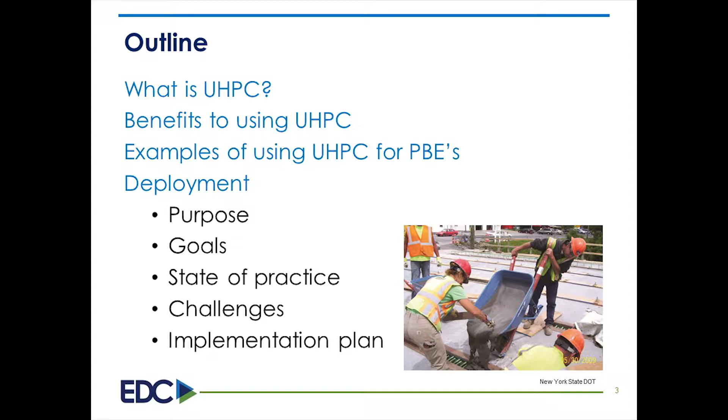So what we're going to talk about today is we're going to start off and explain what ultra-high performance concrete is, what the benefits are to using it, and look at some examples of using it for connecting prefabricated bridge elements together. Then we're going to look at the deployment plan, the Every Day Counts deployment plan, the purpose, goals, take a look at the state of the practice of using ultra-high performance concrete in the country, some challenges to using it, and a few details of the Every Day Counts implementation plan.

So getting right into it, what is ultra-high performance concrete? Ultra-high performance concrete is a steel fiber reinforced concrete that has mechanical properties that far exceed that of conventional concrete. And it has a pore structure that makes it resistant to penetration by water and chlorides.

The most important thing to know about ultra-high performance concrete is it doesn't have any special or magic ingredient you haven't heard of. It's Portland cement concrete. We're familiar with the ingredients - it's cement, aggregate, and water. However, it's a special, unique, new formulation of these ingredients. It uses an especially high amount of cement, doesn't have any large aggregate, and uses very little water, just enough to complete the hydration process.

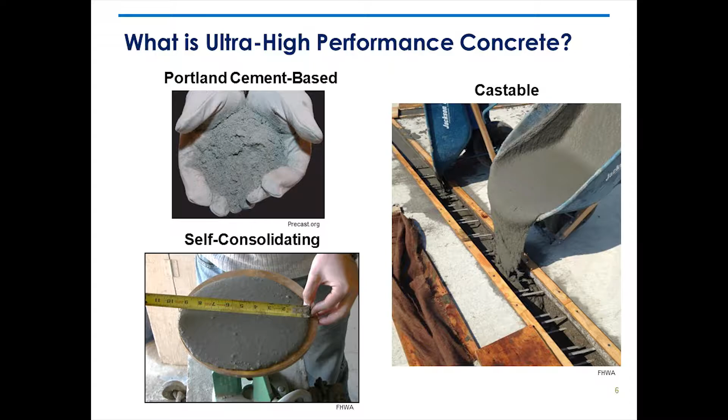In addition to Portland cement, fine aggregate, and water, ultra-high performance concrete also has a large amount of steel fibers. We use reinforcing steel in conventional concrete to carry tension and control cracks, and the steel fibers are used to do this in ultra-high performance concrete. I said there's a lot of steel fibers - I'll say it again, there's a lot of steel fibers. It's 2% by volume, about 250 pounds of fiber per cubic yard.

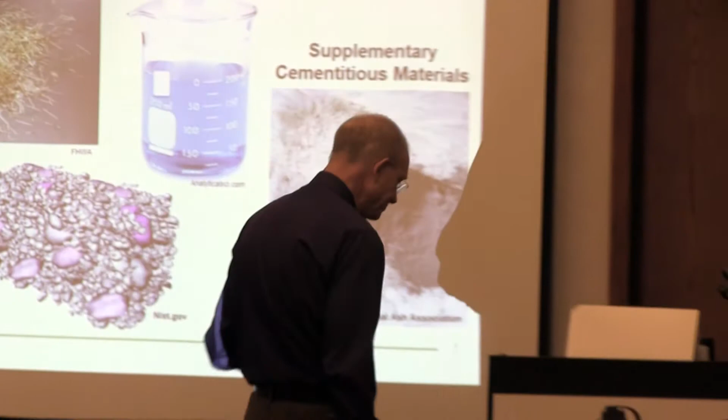Have you seen a bridge deck before they cast the concrete? You see all that rebar in the bridge deck and you say, man, what are those structural engineers doing with all that rebar? Well, oftentimes in a bridge deck, my experience is you have about 200 to 300 pounds of steel per cubic yard of concrete. So what's the point I'm making? That gives you a picture of how much steel fiber we're talking about in ultra-high performance concrete - about the same amount as you would have of reinforcing steel in a bridge deck.

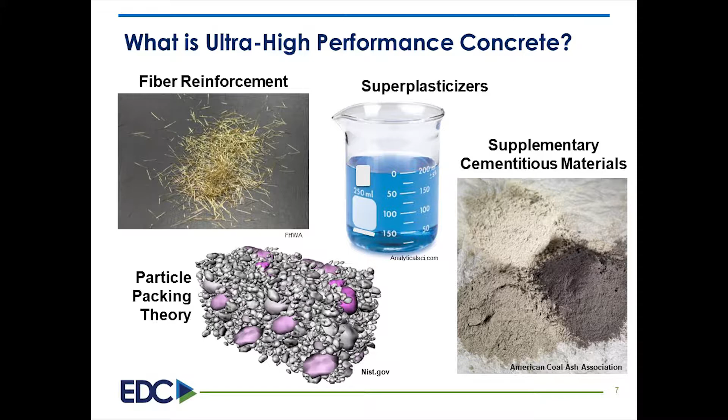Superplasticizers are used to decrease the amount of water needed for the mix while still having a highly flowable mix. In addition to the Portland cement, there are supplementary cementitious materials, usually fly ash, and very commonly used silica fume. There's no large aggregate - the aggregate is composed of fine sand and ground quartz, which are formulated to work with the cement using particle packing concepts to produce a very dense, impermeable mix.

So what we'll pass around now is this is our dry mix without the steel fibers. So here you have your cement, your sand, and your quartz. Let me say that a different way - here you have your Portland cement and all your aggregate right here.

No fibers in this one. But did we get the hockey puck going? There are still fibers in that hockey puck, as you can see, the steel fibers in that one jar, and then look at them when they're in the concrete that's been cast. It's not like, how should I say that? It's not like it's especially hairy, that they're all sticking out or anything like that. Okay, where was I?

Compared to conventional concrete, ultra-high performance concrete is characterized by having a very high compressive strength, a high tensile strength, low permeability, which makes it highly resistant to freeze-thaw damage, and it's self-consolidating.

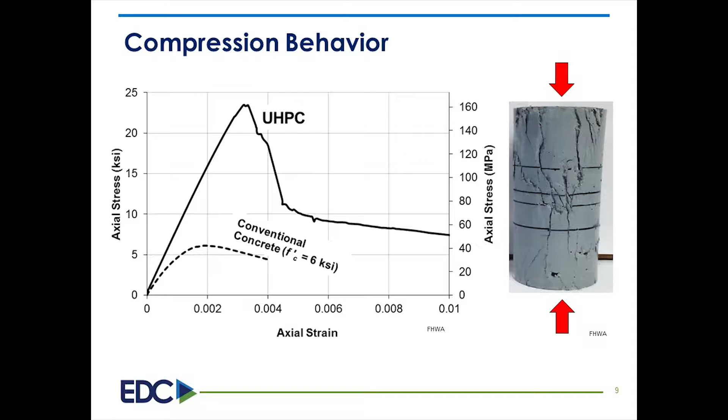As we see here, the strain response to stress, it's twice as stiff as the conventional concrete, and it's about 3 to 4 times stronger than conventional concrete. And even though this strength is very important, it's not as important as the tensile characteristics of the ultra-high performance concrete, which we'll look at next.

This stress-strain diagram compares the tensile response of ultra-high performance concrete to that of conventional concrete. Ultra-high performance concrete is defined as having a peak tensile strength of 720 psi. In this example, the ultra-high performance concrete has a peak pre-cracked tensile strength of 1,300 psi. And the conventional concrete is showing as having a peak tensile strength of 400 psi. So the ultra-high performance concrete is about 3 times stronger in tension than conventional concrete.

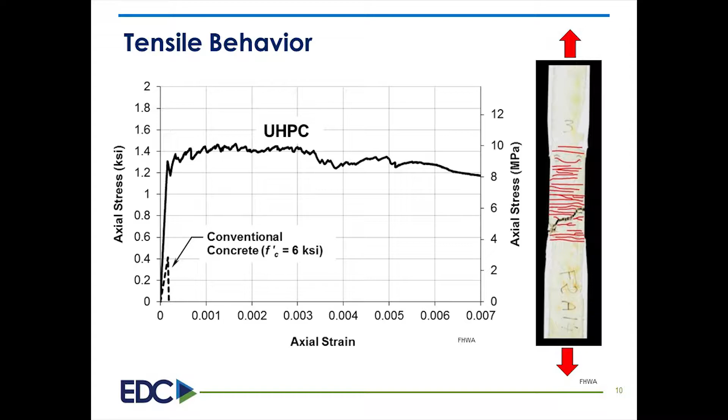But more importantly, the behavior is fundamentally different. With conventional concrete, after the first crack, the concrete loses all its tensile strength. With ultra-high performance concrete, after the first crack forms, the tensile strength drops slightly, but then it goes up again as the fibers extend across that crack. Then the next crack forms, and the strength goes up again. We get this sawtooth behavior as the tensile stresses are transferred from the concrete to the steel fibers.

These fine, well-distributed cracks are shown on this photo on the right by these red lines. Eventually, as you keep pulling on it, one large crack forms and the member fails in ultimate tension. So tension usually controls our design of concrete, and this difference in behavior lets us design things differently with ultra-high performance concrete.

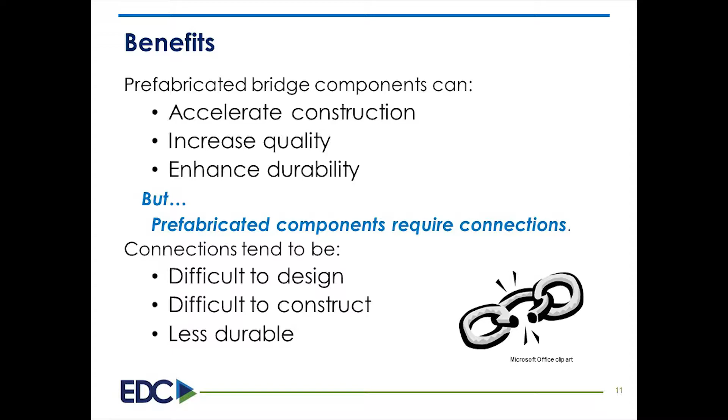Prefabricated bridge elements can be used to accelerate on-site construction time and improve the durability and quality of our bridges. However, some of the benefits of using precast bridge elements can be lost when you go out in the field and connect them together with field cast concrete. Using conventional concrete, those connections between our prefabricated bridge elements, especially the rebar details, can be difficult to design and difficult to construct.

Ultra-high performance concrete can be used to simplify the design of these connections. It's stronger, and it does a better job at transferring stresses from one precast element to the other. Less concrete and less rebar is needed for the connection. But in addition to simplifying the connection, ultra-high performance concrete is more durable. So you don't have high quality precast concrete elements interrupted by connections with inferior concrete. The weak link in the system with prefabricated bridge elements is the connections.

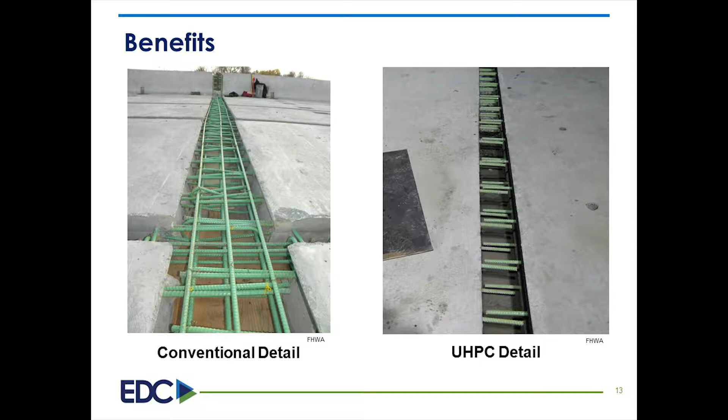Here we compare a connection made with conventional concrete and a connection made with ultra-high performance concrete. These connections are in a precast deck panel, full depth bridge deck panel. Conventional concrete needs more rebar and more concrete for the connection than ultra-high performance concrete. Not only is there less concrete and less rebar with the ultra-high performance concrete, very importantly, there's less congestion. Also, using the guidelines that are available, you don't need to have contact lap splices. So with fewer pieces of rebar that don't need to be in a contact lap splice, we can get less interference in our connections.

Looking at this picture, when we're thinking about costs, we want to look at the total cost of our connections instead of just comparing the cost per cubic yard. The cost per cubic yard of ultra-high performance concrete is very high, but it doesn't give you the full story or the full comparison to conventional concrete. There are more costs going on between these two than just the concrete itself that's being used for the connection.

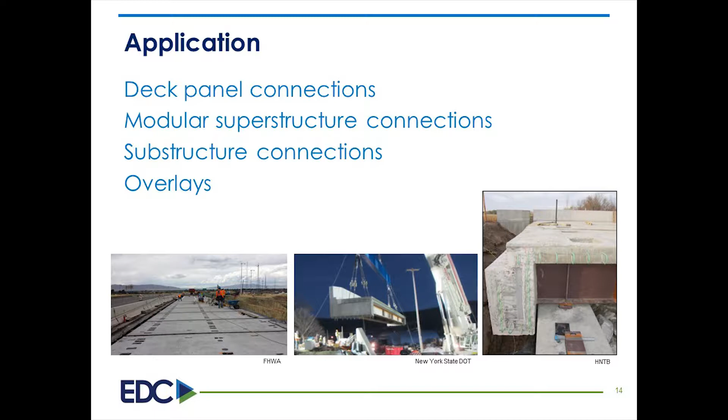Let's look at some applications. You can use ultra-high performance concrete for deck panel connections, for modular superstructure connections, substructure connections, and you can use it for overlays, where overlays aren't connections.

It doesn't belong on this slide, but I put it there anyway. Iowa had the first project this year in the United States to use ultra-high performance concrete for an overlay, and I believe Delaware has a project in mind to use it for an overlay too. Even though it's not a connection, I included it to illustrate that given the durability characteristics of ultra-high performance concrete, there are other benefits beyond connections.

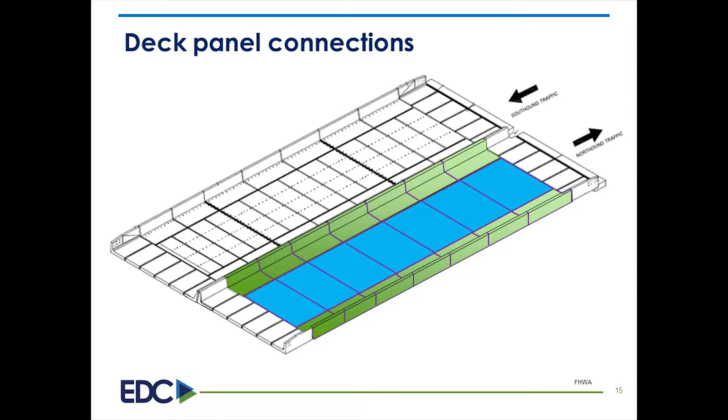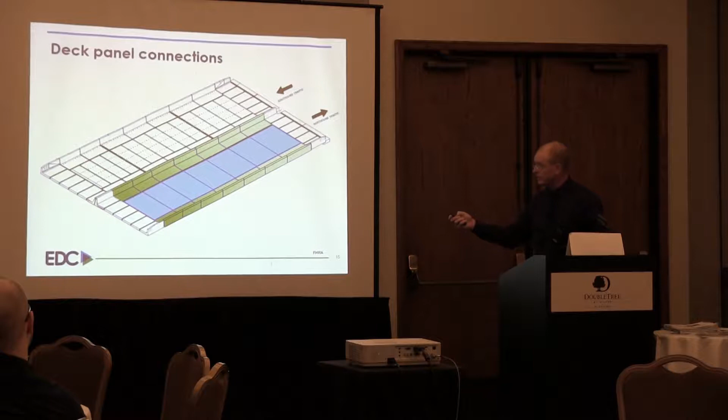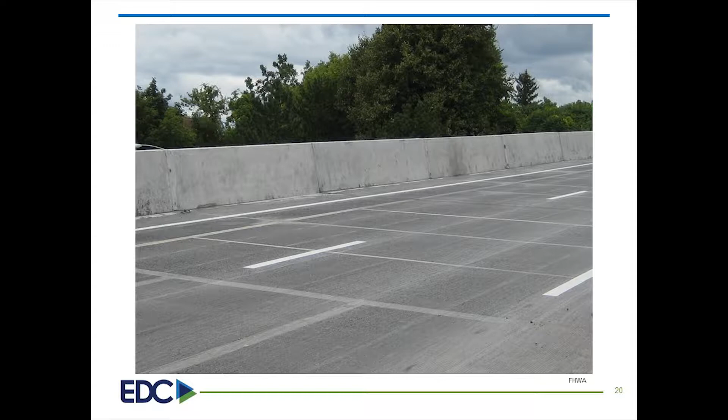Looking at the bridge deck after completion, the light gray areas show where the ultra-high performance concrete connections are located.

Given the durability of the concrete in these precast deck panels and the durability of the ultra-high performance concrete connections, you don't necessarily need to use a protective wearing surface on this bridge deck if you don't want to. In this particular case, New York didn't, and instead they milled the entire bridge deck to provide a very smooth, durable surface.

Let's move on from bridge deck panels to modular superstructure sections.

What do I mean by a combination of details? Sometimes they'll use transverse post-tensioning, or much deeper shear keys. I've seen some details where they put a world of rebar at that joint. With ultra-high performance concrete, there's the opportunity to simplify the connection and have a smaller connection with simple rebar details and very durable concrete along that connection.

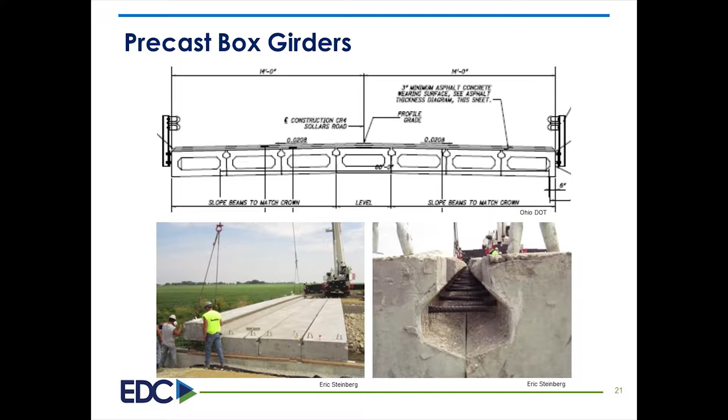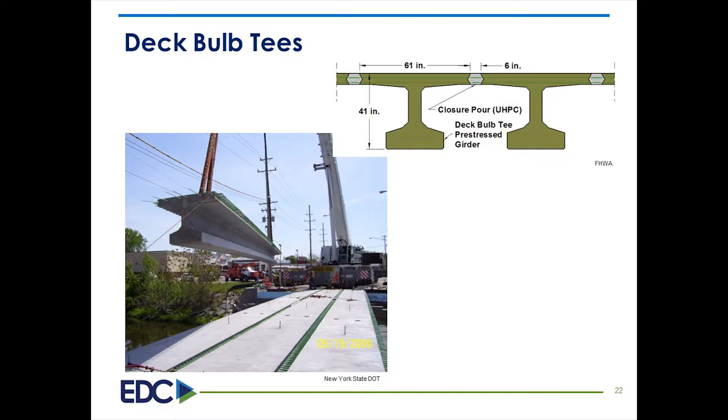Another modular superstructure type: some states like to use bulb T-girders without a deck, and in this case traffic rides right on top of the top flange. It's important to have a strong concrete for this connection, and also a concrete that is durable enough to withstand exposure to the weather and to vehicle traffic.

Ultra-high performance concrete, the state of Washington is looking at it as a solution for this connection. I believe the state of New York, in one of their earliest jobs if not their first, used ultra-high performance concrete in this application, meaning with deck bulb T-girders.

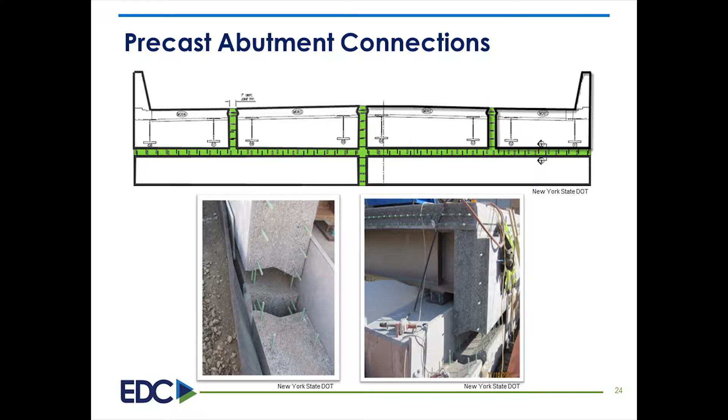This is a project in New York, an abutment. The abutment was connected together using ultra-high performance concrete and was connected to the superstructure using ultra-high performance concrete. As we saw with the bridge deck panels, we see narrow, smaller connections, small quantities, simple rebar details, and little rebar interference in these connections.

Our last example, we'll look at splicing some larger bars, going back to New York.

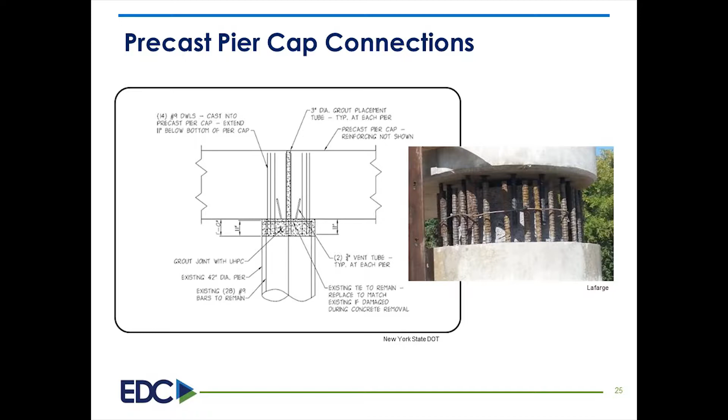On this particular project, New York was connecting a new pier cap to an existing column. Using number 9 bars, they were able to use lap splices and with ultra-high performance concrete, complete the connection within 1 foot. For anyone who designs lap splices, you know that even with number 5 bars, you're starting to get into a couple feet for a lap splice. But with a Class B lap splice with number 9 bars, you would need several feet for that connection, especially if they're epoxy coated - it gets even longer. New York was able to do it with 1 foot. One of the things that's so significant here is that with a conventional concrete connection, they would have had to remove several feet of concrete from that existing column. But here they only needed to remove the 1 foot, which made it a lot more practical.

So what did we just do? We took a look at what ultra-high performance concrete is, some of the benefits of using it, and looked at some applications. Let's look at some of the elements of the Every Day Counts implementation plan for ultra-high performance concrete and the state of the practice in the country. One thing I wanted to say at the beginning of the presentation - at any point please interrupt me if you have questions, and if I say something that doesn't make sense, it's good to catch me right there so I can correct it. So ask questions at any time.

I don't know that I've had any experience with the wear rate on precast concrete decks. In Colorado, because of the connections, we were typically using membrane and asphalt on them. But I'm wondering if the wear rate on precast deck panels is that severe, because with those we're using like 10 KSI concrete in those panels. It's interesting because in the Northwest where you have studded tires, it's surprising how much that Portland cement concrete does actually wear. Oftentimes that pavement - I've seen that rutting - is 4,000, 4,500, 4.4 or 4.5 KSI concrete. With your precast concrete, you're typically getting, or we were at least getting, concrete around 10 KSI for those panels.

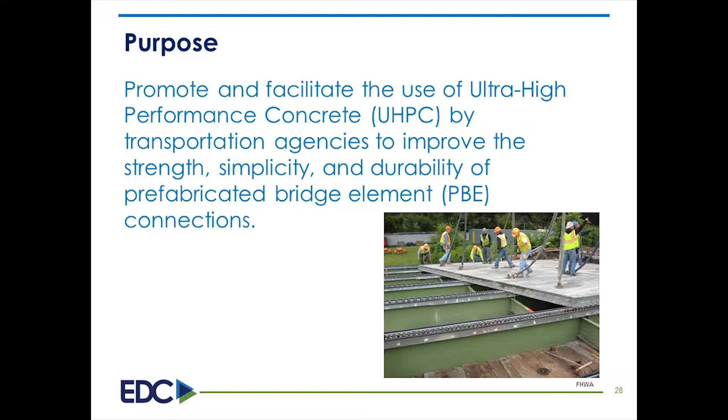The purpose of including ultra-high performance concrete in the Every Day Counts initiative is to improve the connections of prefabricated bridge elements by helping to make the connections between precast bridge elements stronger, simpler, and more durable. The goal is that by the end of Every Day Counts, across the country, bridge designers, engineers, and material personnel have an understanding of what ultra-high performance concrete is, what the benefits are to using it in connections and prefabricated bridge elements, and where they can get additional information on using ultra-high performance concrete.

Looking at goals, a measurable goal for Every Day Counts is by December 2018 for there to be 25 agencies that are at the demonstration level or higher. I'll explain what that means in a minute, but basically it means 25 agencies that have at least used ultra-high performance concrete. Also, by December 2018, for there to be 100 transportation projects in the country that have used ultra-high performance concrete for connections.

In the most recent status report last June, there were already 23 agencies that have used ultra-high performance concrete. They're at the demonstration level or higher. And at that point, there were 63 projects, transportation projects in the country that had used it for connections.

As a part of Every Day Counts, agencies identify their level of experience with ultra-high performance concrete, and they establish goals for where they would like to be at the end of Every Day Counts. As a part of Every Day Counts 3, in January 2015, 12 states had prior experience with using ultra-high performance concrete. 12 states were at the demonstration level or higher, and 32 states had the goal of eventually being at the demonstration level or higher by the end of Every Day Counts.

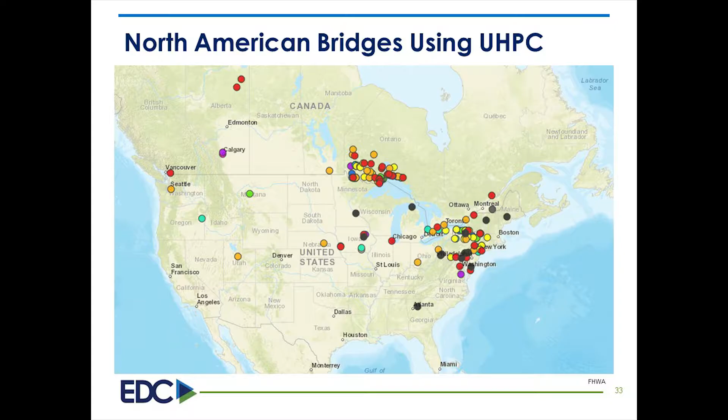In the United States, New York has the most projects. They started in 2009, and I believe they have around 45 projects where they've used ultra-high performance concrete. Pennsylvania started in 2013, and they have 10 projects where they've used it.

Iowa probably has the most diverse use of ultra-high performance concrete. They have 4 projects where they've used it for connections only, and 4 other projects where they not only used it for connections on the bridge, but also to make the prefabricated bridge elements. And they have 1 project where they used it for an overlay.

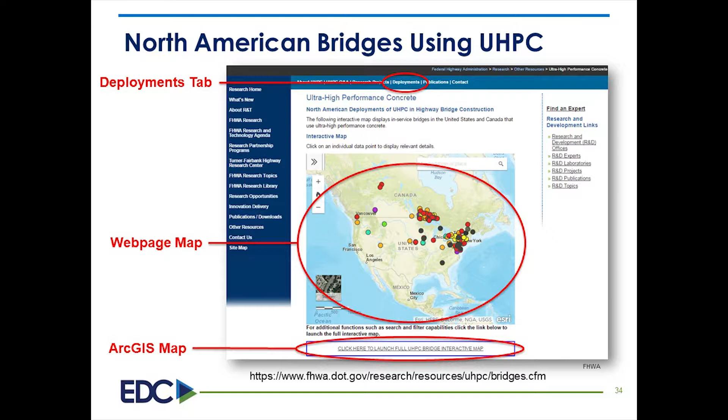This map can be accessed on FHWA's website, and I'll give you the link at the end of the presentation. It's an interactive map, and by clicking on the dots, you can get additional information on each of these bridges - for example, who's the owner, what's the location, how was ultra-high performance concrete used, and when was construction completed. Below the interactive map, all the bridges are shown in tabular format by year of construction.

Some of the challenges to using ultra-high performance concrete, at least for some agencies, are familiarity, specifications, cost, and the number of active suppliers. Many bridge owners and construction personnel are not familiar with it. Currently, the AASHTO specifications do not address the design, construction, and material testing of ultra-high performance concrete. And it costs significantly more per cubic yard than conventional concrete. Currently, the number of suppliers is also limited.

The Every Day Counts approach to addressing familiarity is to facilitate the sharing of information between the states. By gathering all the information that's available nationally, that can be used to increase local familiarity. The FHWA approach to specifications is to provide guidelines for the design, construction, and use of ultra-high performance concrete. And the everyday counts approach to cost is to focus on connections where the quantities are small and therefore the costs are small, but the benefits are quite large.

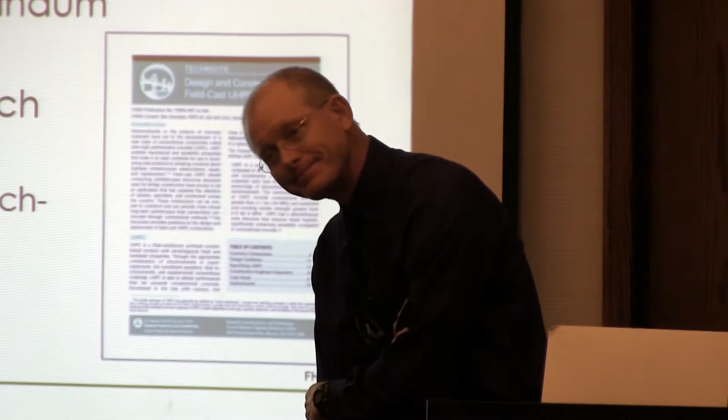So do the tech notes trump the LRFD requirement in 23 CFR for use on NHS routes? Specifically the 23 CFR requirement that you use LRFD - we're wrestling a little bit with our division office regarding the administrator's ability to accept standards. Do you have to go through an individual waiver, or is it an automatic trump card over the LRFD requirements?

My understanding is it's not a matter of the tech note trumping the AASHTO LRFD specifications. It's more a matter that they are compatible. You'll need to check me on this, but when you go into the AASHTO specifications, there are provisions where these specifications can be used, or the owner may elect to use other guidelines or procedures that they deem appropriate for the design. In this case, ultra-high performance concrete is not covered by the AASHTO specifications, so the agency will need to investigate what is appropriate to use. And again, I believe that is compatible with the AASHTO specifications.

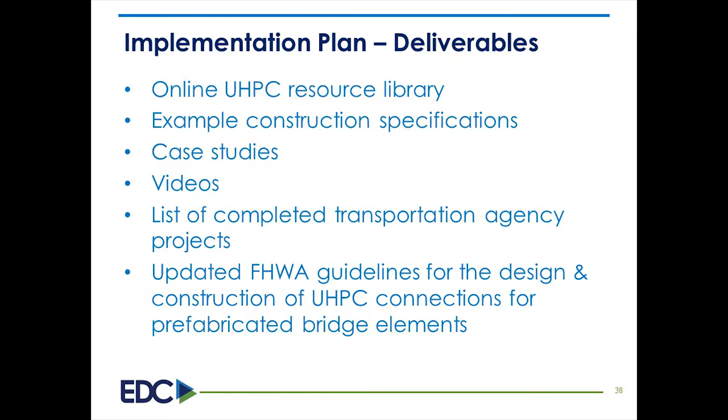Additional activities for Every Day Counts implementation of ultra-high performance concrete include FHWA developing an online resource library that provides access to existing and new information on the material. FHWA will identify and make available example construction specifications that have been successfully used on projects, and will post case studies of notable projects in the resource library. There are also plans to develop short videos showing ultra-high performance concrete materials being mixed, placed, and tested.

As you can see from the map we looked at already, FHWA has started the process of having a list of all the ultra-high performance concrete projects completed in the country. At the end of Every Day Counts, the plan is to update the guidelines for designing and constructing ultra-high performance concrete connections.

The target audience for the Every Day Counts activities is materials, design, and construction personnel that work for and with owner agencies, including consultants and contractors. To get the maximum benefit out of the webinars and workshops, it's good for them to be attended by state employees, local agencies, federal employees, as well as consultants and contractors.

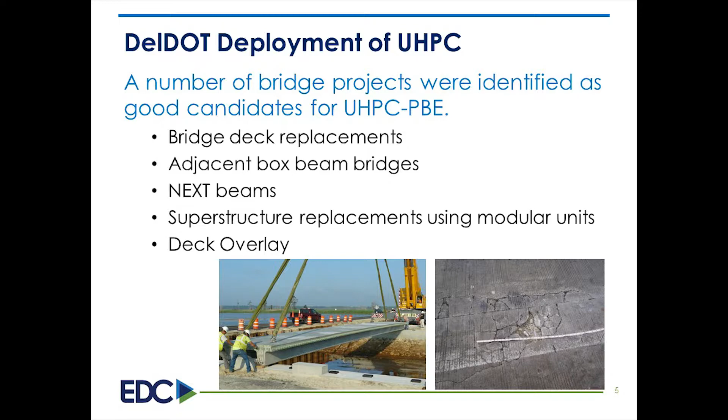So the types of bridges, just like Mark was going over, that we consider are bridge deck replacements, adjacent box beam bridges, next beams which are very similar to the bulb T's. They're kind of like garage T-beams. Superstructure replacements using modular units, and even a deck overlay, which we currently have in our program. We're waiting to hear back from FHWA on a grant for that.

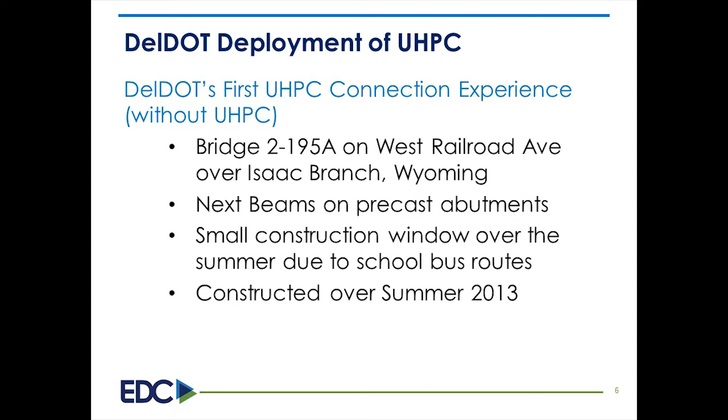So our first UHPC connection experience was actually not a UHPC connection experience. It happened on a little project we had in a town in lower Delaware. It was in the middle of town, there were schools on both sides, and they wanted us to build it over the summer, so we used an entirely precast structure. We used next beams, and the next beam details called for UHPC.

Now, I had a very good senior designer, a Jamaican fella who worked for me, a good friend of mine. I still remember he came into my office and said, 'Look, man, I don't know nothing about this UHPC business.' And my Jamaican accent's bad, but he said, 'I want to use high strength grout.' He's like, 'I don't even think we can get this stuff through Buy America.' This was in 2013. And he says, 'I think we can accomplish the same thing with a high strength grout.'

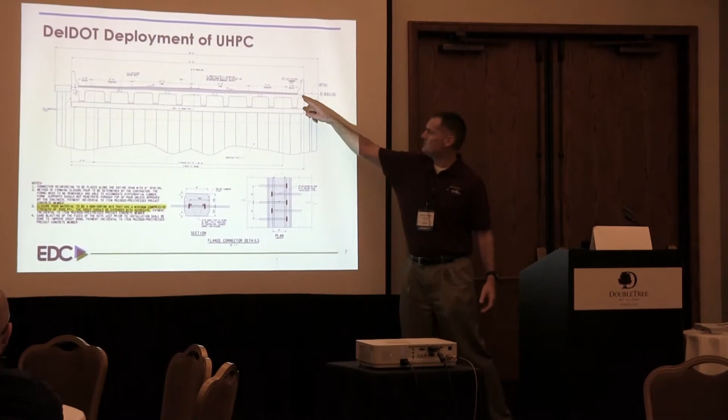So that's what we did. So this is what it looks like. You can see the next beam is just a double beam. They're 8 feet wide. They have connections very similar to what you'd see on a bulb tee. And we were going to put a membrane and hot mix over top of it.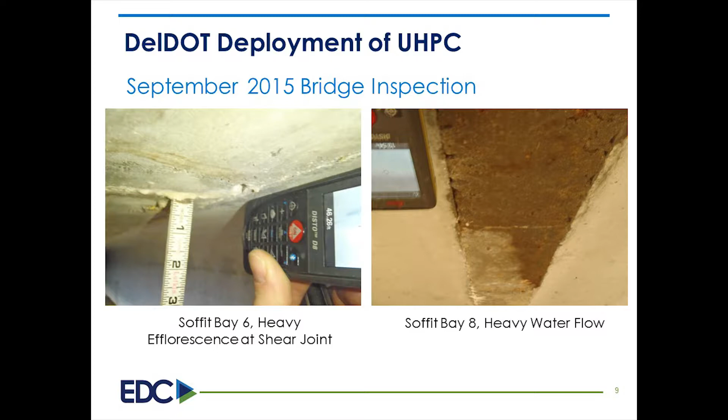joints looked like they were a little bit wet. It looked like they might have been leaking. So this is what we saw two years later in our 2015 bridge inspection. We already had heavy efflorescence at the shear joint. You can see water flow coming openly through the joint. So we had a couple issues. Our membrane was failing, but more importantly, this is the performance we were getting out of our high strength grout.

So some of the lessons we learned: we ended up having to go back and mill off all the hot mix, put a new membrane down and try to seal the top of it, and it seems to have stopped some of the water through it. But what we learned is that high strength grout is not equivalent to UHPC, and the money saved by not using UHPC - because that was one of our things too, it's too expensive, why are we going to use this - was lost in maintenance. And we liked the use of the NEXT beams, we were able to build fast, but we needed to come up with a better detail.

So we figured we better find out what this UHPC business was all about. And that's what took us to the 2014 Every Day Counts, and why I ended up in the room with the UHPC. So I always take a designer with me when I go to Every Day Counts. I'll take my bridge design engineer, but I like to take designers who are actually doing the work, because they're the guys I want to get excited about the things we're going to be implementing.

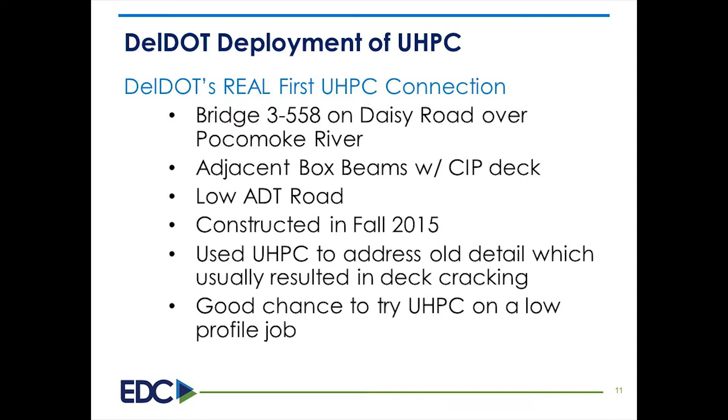And we sat through it, and one of the designers I had with me had a project. It was a simple project, adjacent box beams, nothing critical. It was on a rural road, not where we would normally consider UHPC. And he said, 'You know what, I want to use this on my project. We always get the cracking between the adjacent box beams.' It was a low ADT road, it was a low risk for us as a state agency. And I said, 'You know what, this might be a good opportunity.' So he went back, and he was at final plans.

He went back and revised his details, called up some precasters, told them what he was doing, and we ended up putting this thing out. Within a couple months of Every Day Counts, we ended up advertising this project after we had come back.

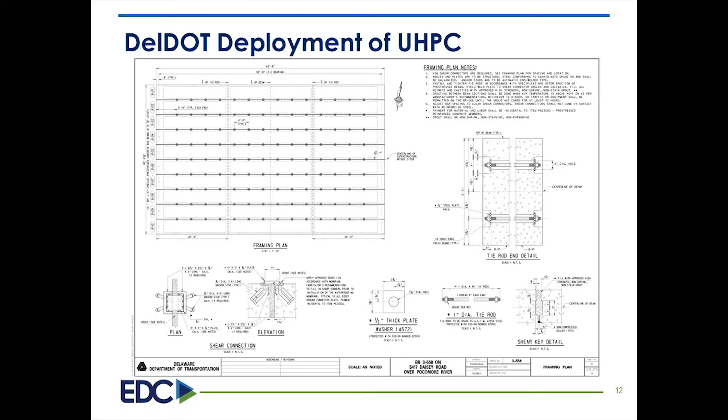So you can tell that's pretty intense detailing for a bridge that's still going to crack. This is what my designer came up with: very simple. You had studs coming out of each side, and we're just going to fill it with UHPC. We got rid of the post-tensioning, we got rid of the shear studs, and it was very, very simple for him to change in detail.

Now, it was more difficult for the fabricator to make. He already had his shear key forms done, so he had to come back. He did not have a way to extend the bar out of the form, so what he ended up doing was putting in threaded inserts on the inside. You can see that's what the picture on the left shows, and this is what it looked like after they had set it that day.

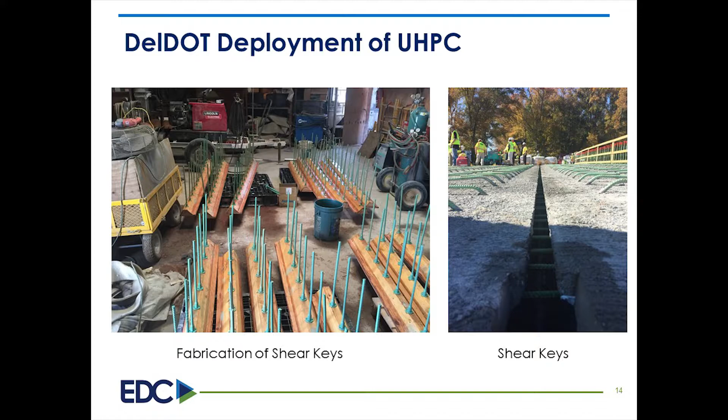So this is our first use. We're all excited. We had a pre-pour meeting to discuss how we're going to lay this in. We did not have the most astute contractor. He really did not do a lot of investigation, at least the foreman didn't, into what it was, and he thought he was just pouring grout.

So we had to have a second meeting with the supplier, and he had to do a test pour. But even so, we had a foreman who was very determined to do it his own way.

The guy from Lafarge was going out of his mind. He could not get through to the contractor to do it his way. So the representative from Lafarge started taking boards, laying them down, and top forming. He borrowed one laborer. There were 9 joints. The foreman refused to give up. He did the one on one side and then the one on the other side. The guy from Lafarge with his one laborer did the other 7.

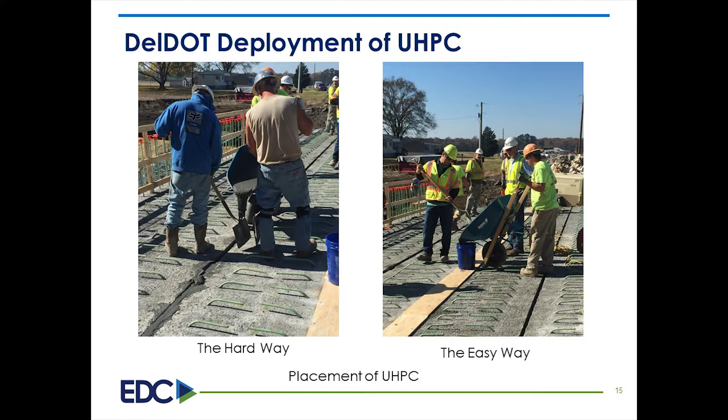But even as he's laying these things out, the foreman would not give up. But it ended up being a really good product. So what they did: he top formed, he used buckets, just dumped it into the buckets, used the pressure, and the stuff flowed from one end to the other. We got a really good product on it. And the guy from Lafarge, he was hilarious. He was cursing like crazy at that guy.

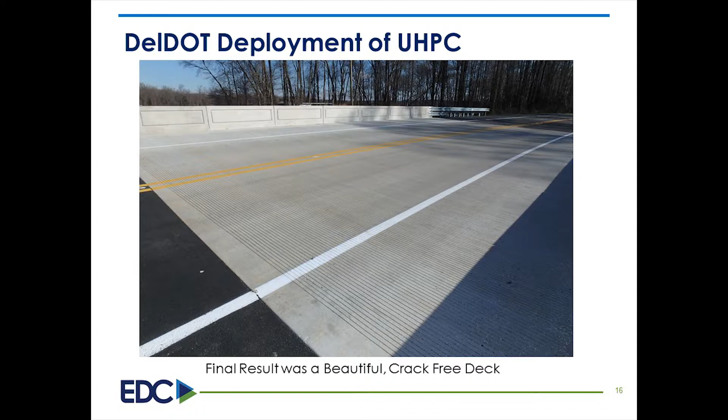But this was our final product, and it ended up being a deck that was just absolutely beautiful. Not a single crack in it.

So some of the lessons we learned: listen to the supplier, right? And we cannot stress that to our contractors enough.

UHPC forms must be tight, they've got to be watertight, and we had them water tested. The contractor was furious that we made them water tested because they had to fill with water and suck all the water back out. The cast-in-place deck was overkill.

I don't think we needed it here. It was our detail. Our next one will not have a cast-in-place deck. We'll either have a membrane and hot mix or just a thin overlay. Actually, we're looking at doing a UHPC overlay.

UHPC was expensive, and I'll go into that later. But the new details for the precast box beams were a little more expensive, but not as bad as we thought they would be. The end result was what we wanted, which is going to be a durable bridge.

So we took this and we built on it. We had another project in design, and another designer went out and saw this. He said, I want to use it. I have some next beams. It was a marsh setting.

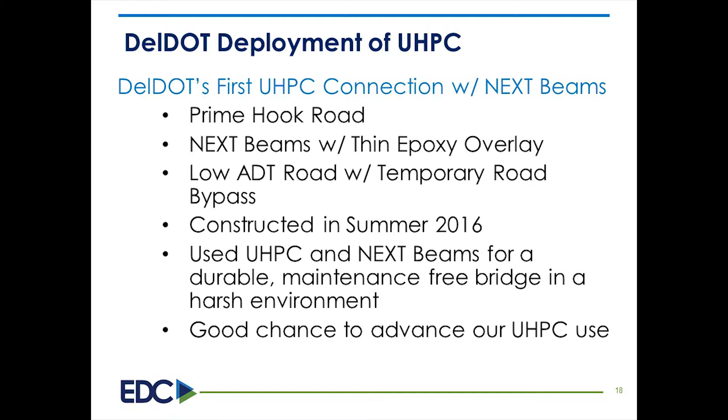Once again, this was not for speed, but we did this because we wanted a durable product. It gets inundated by the tide occasionally during storms, and we didn't want box beams because we don't want water getting into the beams. So we ended up using the NEXT beam, and it was a low ADT road. Once again, it was a low-risk project for me.

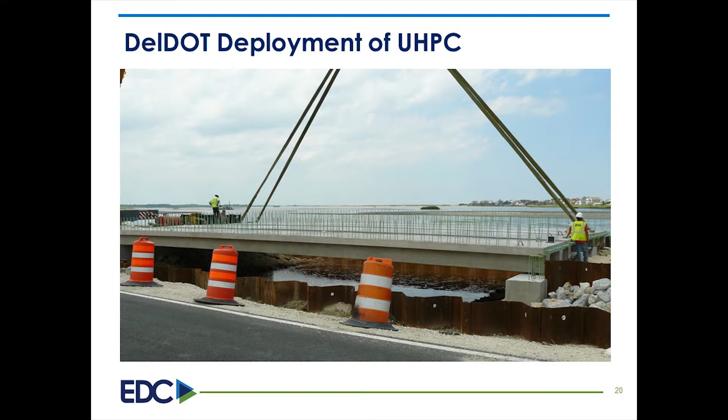He formed it up on the bottom, had it dried up, and just used forms and jammed them up in there. He did do the top forming, and I like that picture. One of the issues they had was the mixer was small, and they couldn't mix as fast as he could place it. So that was kind of the driving point here.

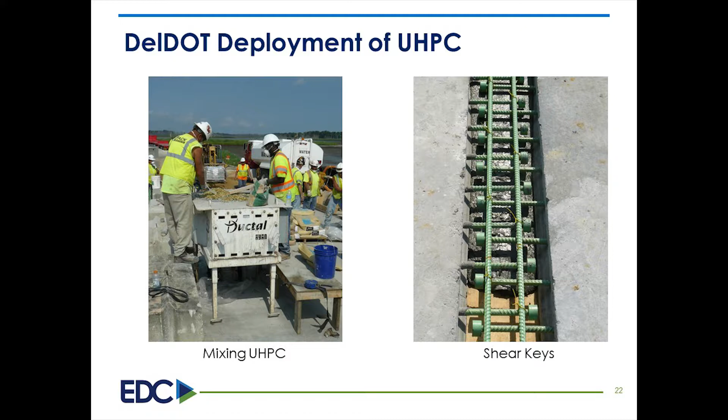But you can see the shear keys, very simple—just a stud on each side and 2 pieces of bar going down. Very, very simple to put the rebar in, very easy to construct.

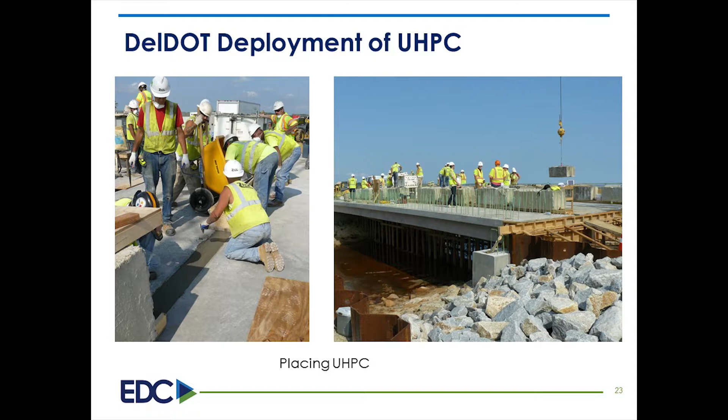For his top forms, he used just concrete blocks to hold the forms in place, but he also used them to help balance out some of the camber between the beams. When you have pre-stressed beams, especially some with barrier and some without, you get some variations in camber, and he was able to do some leveling of the beams with the weights to get it even, because we did not have an overlay on this one—we had a thin epoxy overlay.

But this was the final surface after grinding. See, it came out really good. They UHPC'd it a little bit high, ground down the surface, and then they put what we call a thin epoxy overlay. It's basically the epoxy and then the grit.

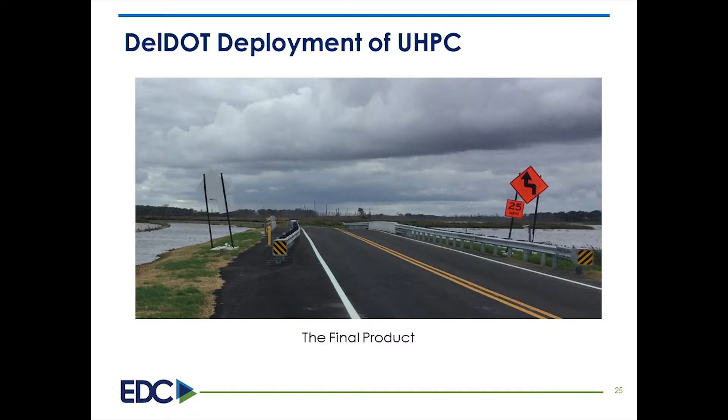The final result was really good. You can see the marsh-type setting there, but we have a really durable bridge there. So really good experience for us.

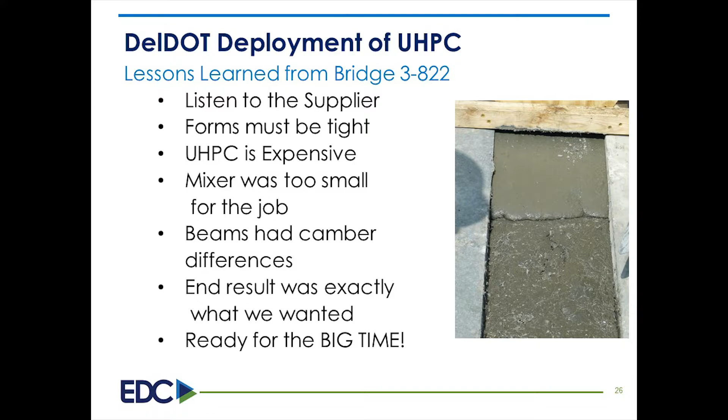So some of the lessons we learned from this one: once again, listen to the supplier. Forms must be tight, and the contractor here did a terrific job of it. UHPC is expensive—looks a little bit similar to the first ones. The mixer was too small for the job on this one. The beams had camber differences, but we learned how to deal with that with the weights. But the end result, once again, really good product.

So we're starting to get really excited for it, and now we're ready to go from the low-risk jobs to a high-risk job. My high-risk job, and this was kind of our goal all along, was on I-95 northbound—over 100,000 cars a day, okay? Big time location for us.

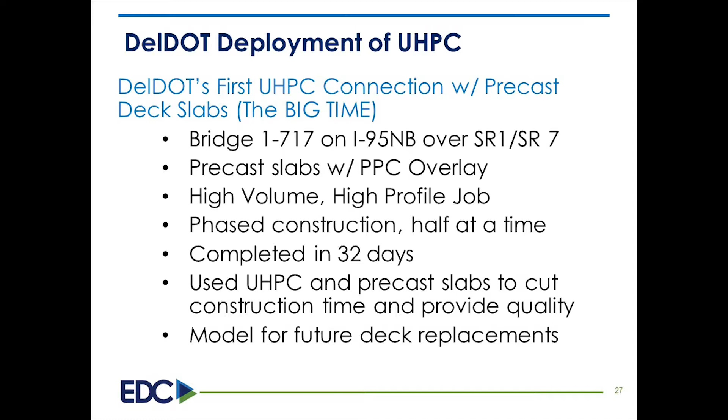It's right near the shopping malls. There's never a good time to do it. We had precast slabs with a PPC overlay on top of it, and we chose to use an overlay—like a 3/4 inch overlay—in case we had any differences in the slabs. Very high volume, very high profile job with phase construction, half at a time.

Now, New York DOT does bridge deck replacements in 3 or 4 days. We haven't had that kind of success. Our contractors—and this was a difficult job, I'll show you—but we completed this in 32 days. It was projected to be about a 4.5-month job. So we cut a lot of time out of it, and it's something that we're really happy with and are going to use in the future.

We left all the joints in place, which actually provided us with a nice divider too, so we didn't have too big of UHPC pours at a time. In case anything were to go wrong, we wouldn't have had the whole bridge.

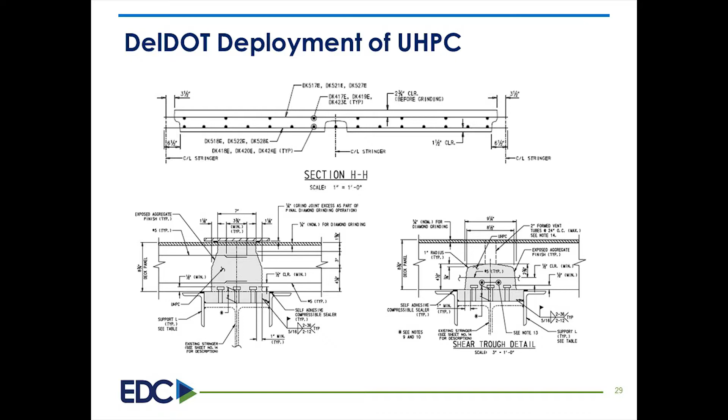But where we went over top of a beam, we had what we call a pocket detail. So we could have the shear studs remain on the beam, and the slab just went up and over. And then we had holes in the top spaced at about every 2 feet, and you could see it as it filled up because it would actually come out of the next hole.

And the UHPC then makes it a composite deck.

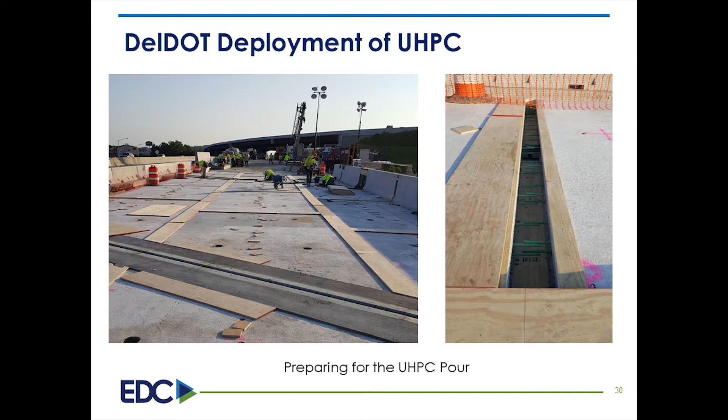So here's some of the pictures of it going on. Once again, we did have a really good contractor on here. He helped work through some problems. We had tolerance issues on our precast slabs, but because you've got a 4 to 8 inch joint there, you got enough room to take up some of the tolerance differences. And because we were putting in an overlay, if they weren't exactly level, it wasn't a big deal because we were going to grind it down and put an overlay on it anyway. But this was preparing for the pour.

And this was the final surface after grinding. And then on the right, you can see we're putting down the PPC overlay. It's like a light brown, very thin overlay on top of it to help take up for any of the differences.

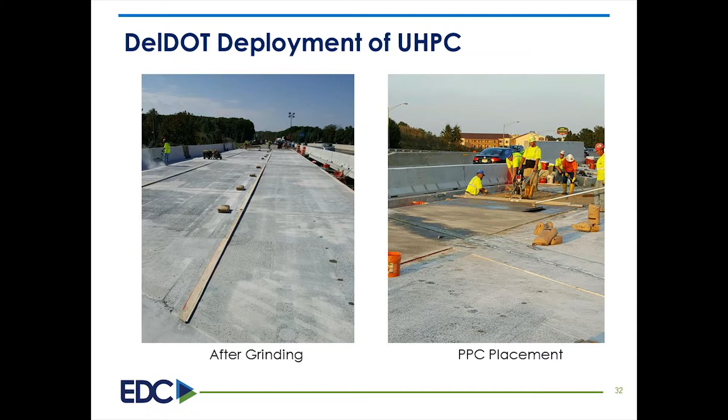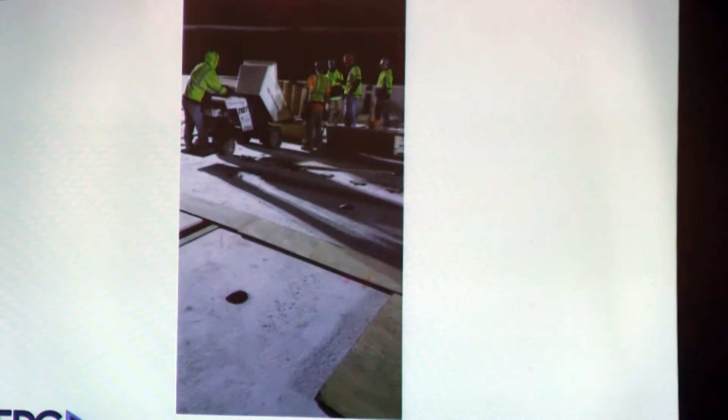And in the video, you'll see they bring in the little buggy that's carrying the UHPC. He'll come in, he's going to dump it into the trough. The troughs are set up over the joints. They actually filled up a lot of the joints without the top form. And then when they get near the top, they would put the top forms on. The top forms are set about a 1/2 inch high.

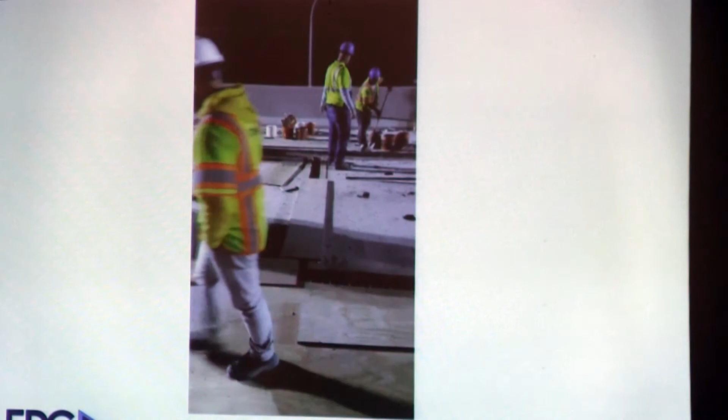And then we just come back and we'll grind the difference off. But they were able to watch the UHPC flow through. We had guys underneath checking for leaks, but because it's water tested too, we didn't really have a big issue with that.

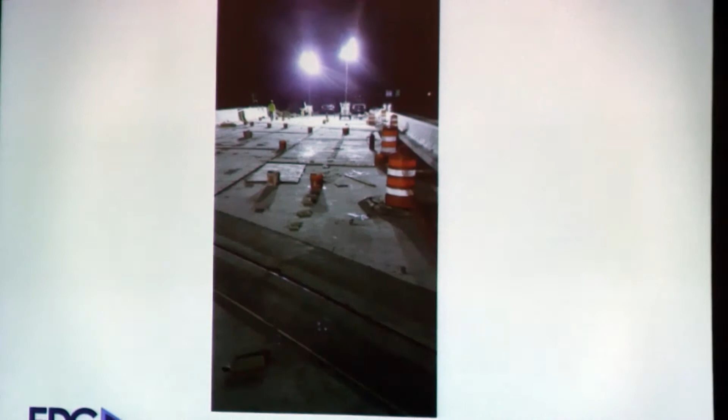And you'll see as we turn to the right, those right there, that's one of the intermediate beams. Okay, so those are the pockets. You can see they're spaced, looks like they might even be every 2 feet. So as they're placing the UHPC over top of one of those with buckets, they can see it forcing out of the next one, then they would cap it. And that way you make sure you're completely filled up.

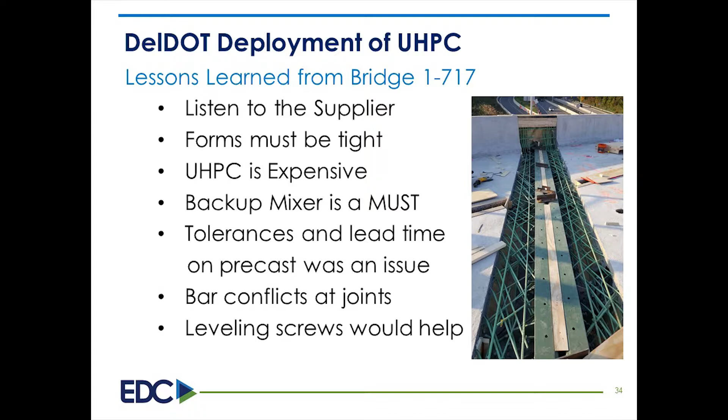So some of the lessons we learned, once again, listen to the supplier, right? Forms must be tight. UHPC is expensive. Backup mixer is a must. Tolerance and lead time on precast was an issue. Our precaster really, I was disappointed in what we got from the precaster, but we were able to adjust in the field. We had, at our joints, where we had the expansion joints, we had some reinforcement issues. That was more from the reinforcement coming off the expansion dam. But the UHPC had no problem, because it's like pancake batter, had no problem going around it.

And we also learned that we want to use leveling screws on our next one, because we set grades with the angles, which caused us to have some very heavy angles, and also it was a little bit tough to control. So if we don't want to do an overlay, we're going to use leveling screws on the next one.

So from here, where do we go? Our next project, this is actually really cool. It's bridge 1-680 for us. It's another high volume roadway over a high volume roadway. There's no room to do this half at a time, so we have to go in and do a full closure. The bridge is over 700 feet long. We're going to do a complete closure, working 24/7, trying to get it done within a summer. Once again, we've got a lot of schools in the area.

Precast deck panels with UHPC connections, and we're going to do no overlay. So we're just going to grind it and go. Similar details to Bridge 717.

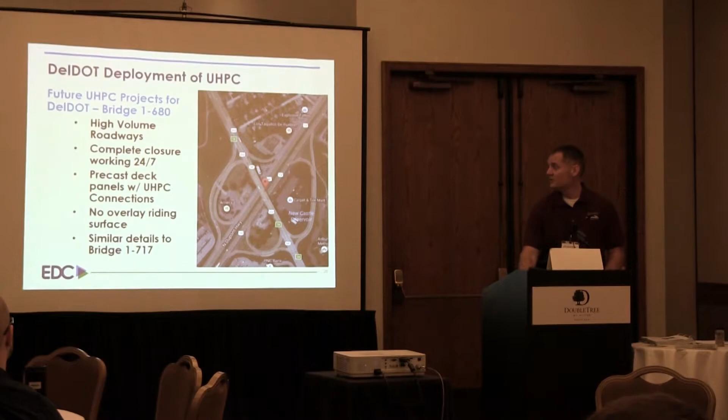One of the cool things, we went to a recent public workshop to tell them, look, we're going to close your road with 40,000 cars a day on it, and we're going to try to get it done fast. Overwhelming support from them. They wanted us to do exactly what we did on I-95. We got a lot of good press.

Another good thing for you state DOTs, our Secretary of Transportation recently went to our budget hearing, and one of the things she did was present what we're doing. We did a time lapse of the project we did on 95, and she got a lot of support, and we ended up getting all the money that we asked for. So you can buy a lot of credibility also by performing.

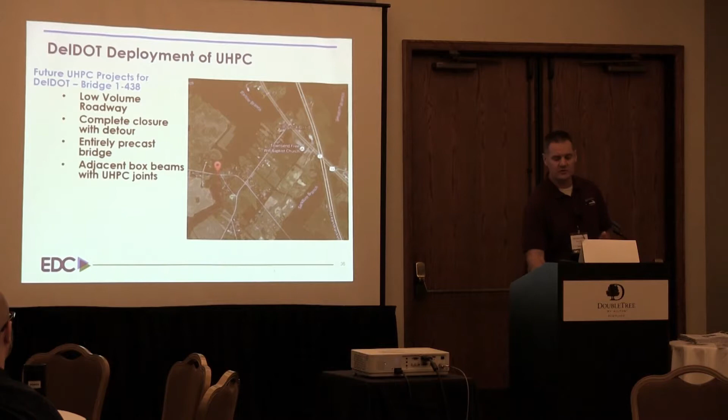We have another project coming up. Now this one is a smaller project. It's a low volume roadway, but it's a complete closure with detour, and it's a pretty long detour. So we're doing an all precast bridge. It's going to be adjacent box beam, similar to the one I showed you earlier, but we're not going to do a precast concrete deck on it. Instead, we're going to do a thin UHPC overlay.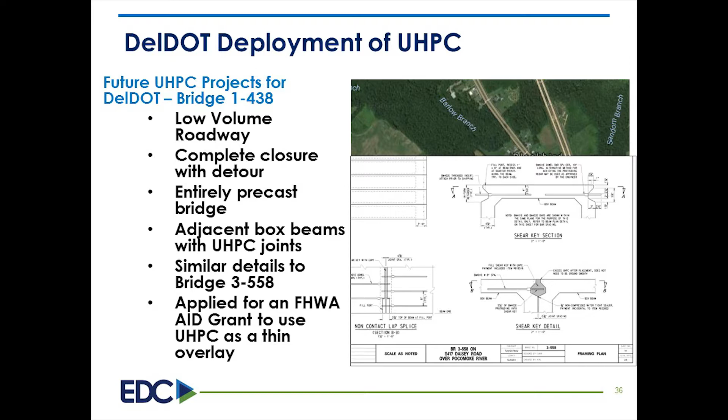And we applied to FHWA for an AID grant for it. It's going to be a little more expensive. We're excited about the possibility of using this, and once again, having a durable bridge that we don't have to go back to for 75 or 100 years.

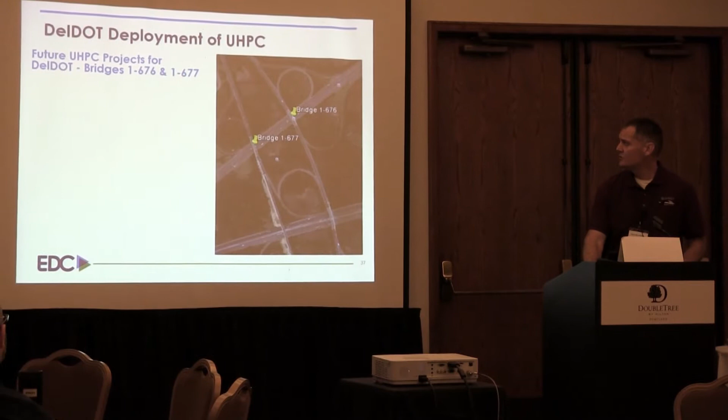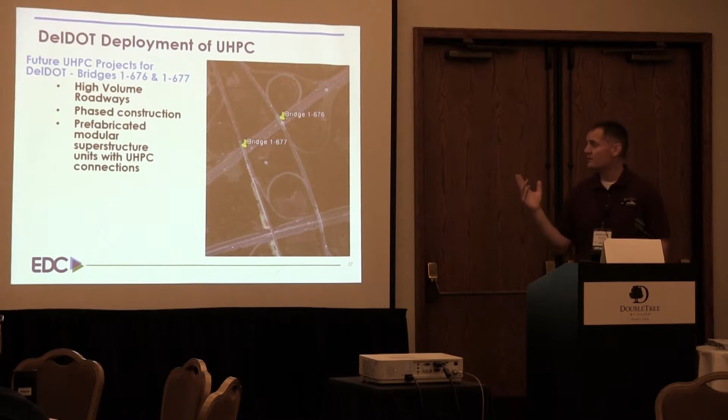After that, we've got two bridges. Once again, these are over I-95, and this is on the same roadway, 141, another high volume roadway. This is going to be phased construction. We're using prefabricated modular superstructure units with UHPC connections. So I'm ticking all of your project types right off, Mark, that you were talking about.

We're going to bring these in. We'll set them side by side. It takes it off of the critical path, takes it from a 2-year project to a 1-year project by using UHPC. And we're also using precast piers, and it's going to be an accelerated project.

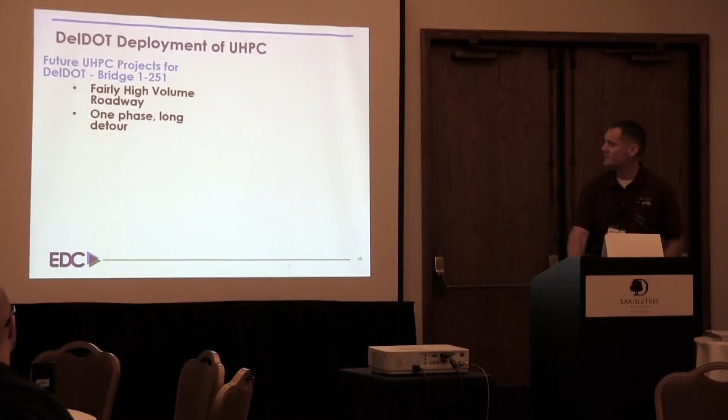And then we have another one. This is another deck. It's going to be a long detour, one phase. We're going to do deck replacement. And every time we do this, we're looking to learn, improve our details.

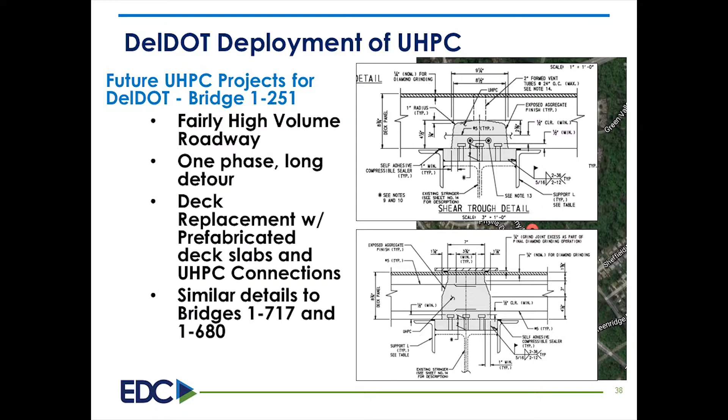But I don't want to change my details a lot, right? My contractors are starting to get used to using UHPC. I want them to get comfortable with the details we're using. We're getting feedback from them on our previous projects so we can learn to make them a little bit better for them. But we want to just keep tightening the time a little bit. We want to keep improving our details. And so we'll be using very similar details to what we used at 717.

So my last part I want to talk about is the cost. We were told anywhere from like $3,000 to $5,000 a cubic yard. We're not really seeing that. We're seeing more like $7,000 to $8,000. We've only done a few projects.

My first one was $425 a cubic foot. The second one, I had $200 a cubic foot, but if you looked at the precast price, it was a lot higher, so I think he just did some shifting of some of his costs. And then the last one we did, we had $283. So we're right around an average of around $300 a cubic foot between the projects.

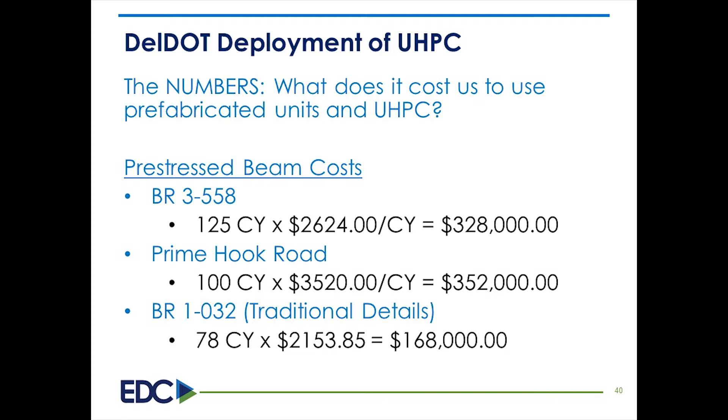The beam cost I talked about earlier, we had different details for the beams. It wasn't a big deal though. We're looking at $2,600 for the adjacent box beams per cubic yard versus $2,100. Wasn't really a big difference in the beam cost.

My deck cost was a lot different. So my first precast deck, comparing previous deck jobs we've done, I get around $54 per square foot. I know that number is all over the place, depending on where you are in the country, but my cost was around $54 a square foot. With precast panels and UHPC, I'm at $140 a square foot. So we're talking 260%.

So on this job, it would have cost me around $1 million to do a deck. Instead, it cost $2.6 million. You say, wow, that's big.

We're a small state. My budget's $30 to $50 million a year for bridges. I take that seriously. But when you look at the user costs and MOT costs, I cut 94 days off of this project. My MOT costs, if I go by my daily costs for drums, signs, lights, all that, were $8,000 a day. So of my $1.6 million, I get $800,000 back in MOT costs alone.

So that $1 million job with the added MOT would have been $1.8 million versus $2.6 million, looking a lot better. If I look at my user costs for this job, just doing it in phased construction and dropping the lanes, my user cost was $18,000 a day. It makes it easy for me to decide to use UHPC. Not to mention we had to fit it in a window from the middle of October to have it open by Thanksgiving for shopping because of all the malls in the area. So it was a really big win for us and actually a very easy decision to make regarding costs.

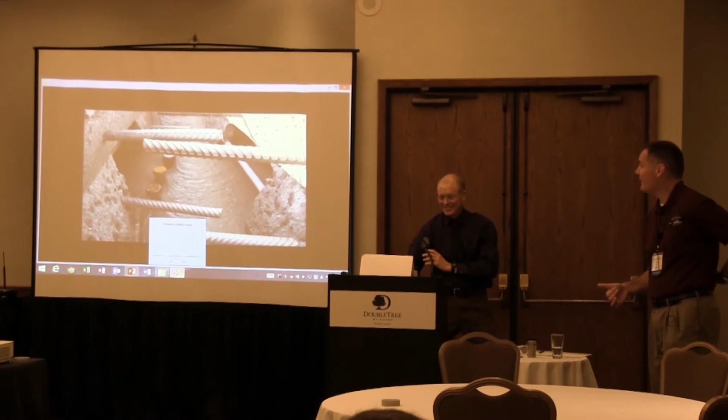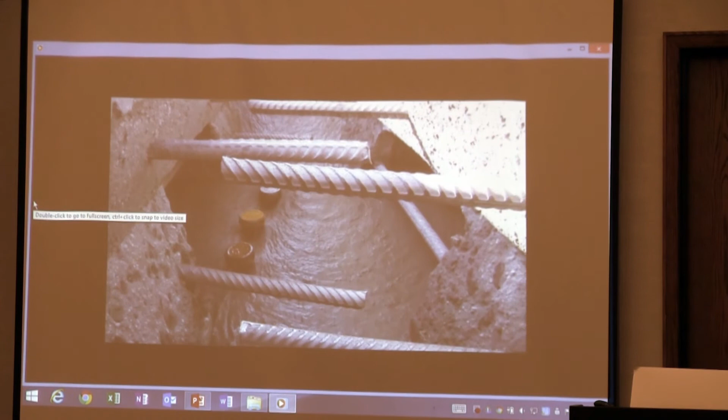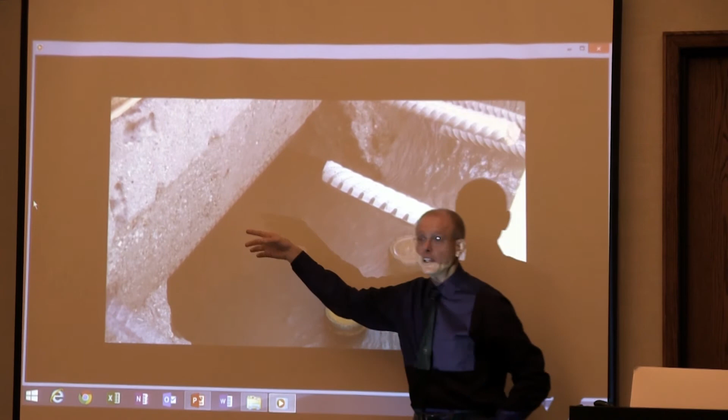I did have a video too of our project, this is Marc's video, that's exactly how we saw it flowing. We had concerns from folks about the connections you can't see, the pocket connections on the precast deck panels, about how it would flow through. When you go out and watch it get done, you see them between the girder and the deck. And then you have pockets on top, and you see the UHPC being forced out of the pocket on top. You feel very comfortable that it's coming up through.

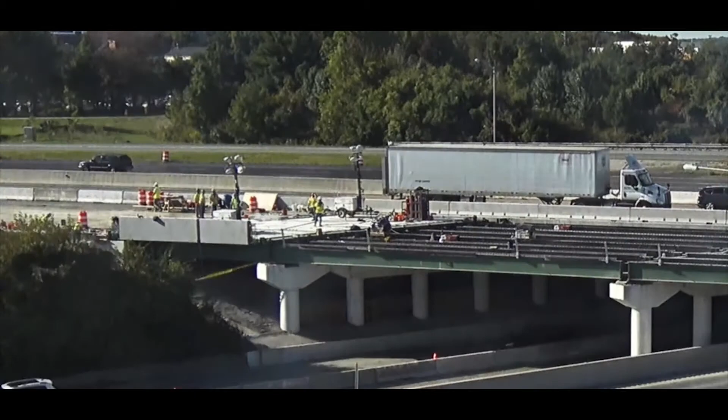It's a high volume roadway underneath, so they had to be very careful. They had shielding up to do it, but then the deck panels just came in. Once they got the demo done, the deck panels went down in like half a day, they went down so fast. And the barriers connected to the panels, they used UHPC on the barriers as well as on the deck.

You can see the second half is going to go a lot faster, now they've got traffic on the first half. The second half, because the contractor learned, he picked up momentum, and then the deck was done, and it got really good press, which is unusual for Delaware because the newspaper won't put anything in unless we've messed something up.

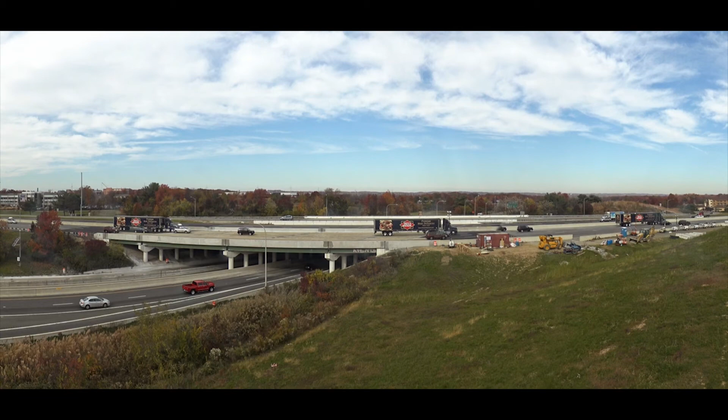On that barrier joint, did you bring the ultra-high performance concrete up? We did, we used UHPC on the barriers too, and it came all the way full height.